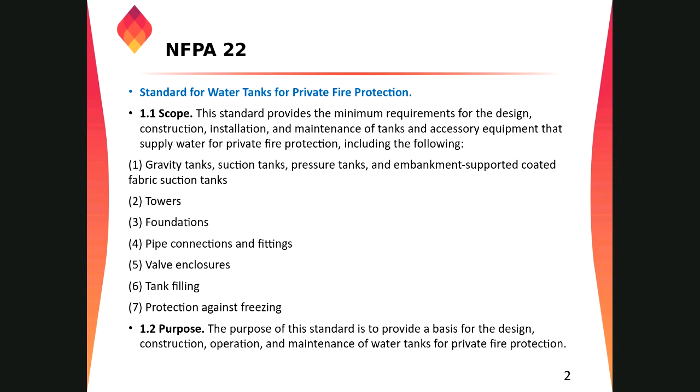So first, we are going with some of the general definitions. What definitions are there in NFPA 22?

You can see at the screen, we have the break tank. The break tank is normally needed between the public fire water supply and the connection to the private fire protection system, meaning before the fire pumps. The definition of the break tank is a tank providing suction to a fire pump whose capacity is less than the fire protection demand.

So we use break tanks after taking a connection from the public fire protection or public water supply. We'll discuss that in detail. For now, just know that the break tank is before the fire pump, and the suction of the fire pump comes from this break tank if there is a supply from the municipal water supply. We'll discuss it in detail in a while.

Suction tank means any tank providing water to a fire pump. There are different types of suction tanks: above ground suction tank, underground suction tank, and gravity suction tank.

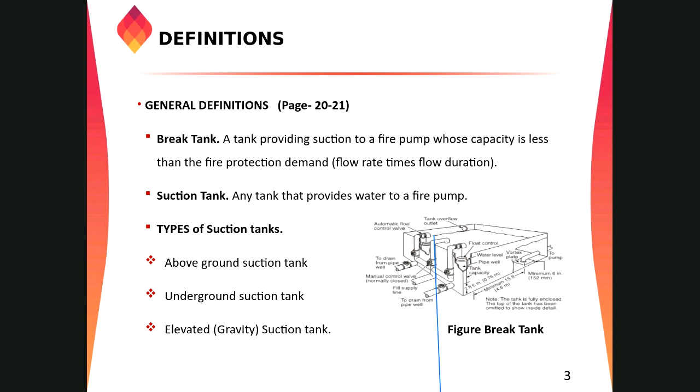The one you can see is a suction tank, an above ground suction tank. This is most common in Saudi Arabia or any petrochemical plant or any kind of plant. This is the most common one.

So you have to design the tank in such a way that when the pump is running at 150% of the capacity... Now we'll discuss what is 150% of the capacity. Suppose the pump is rated for 1000 gpm with some pressure. If that pump is running at 150% of the pump capacity, it means the pump is going to take 1500 gpm. We call this 150% of the pump from the performance curve.

So what I'm trying to say is that the tank should be sized for the pump duration. Duration means what is the fire protection system's maximum supply in number of hours. Normally it is from 1 to 4 hours. Based on that, we have to calculate.

Suppose your fire protection system requires 4 hours of continuous water supply. So we need 4 hours of water into this tank, and the pump is running at 150% of the capacity.

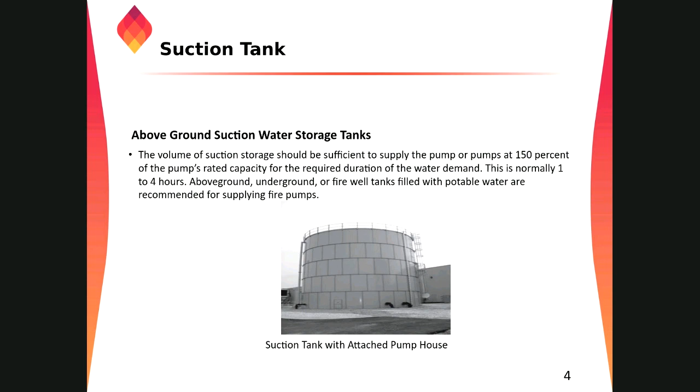The one you can see at the screen, we have a ground level suction tank. This is just the general component of the suction tank. On the left we have the notes describing each component, and on the right we have the schematic diagram. There is a tank, and just below the tank we have fire pumps which are taking suction from that area.

The first one is the pump suction tank, and the second we have a screened vent at the top. If there is some air inside the tank, it will go outside. The third one is the overflow piping.

This overflow, suppose the tank is continuously pumping water to refill the tank, and there is piping water going above this pipe to the overflow connection. The water will go out from the tank.

The fourth you can see is the steam coil for heating. This is normally required in areas where we have problems with temperature, when the temperature goes into the minus, or where we have freezing conditions. In that time we need a steam coil for heating. Normally in western countries like Canada, USA and Europe, where temperature is always in minus, they need this kind of arrangement. But in Saudi Arabia, I think there is no problem with freezing temperature.

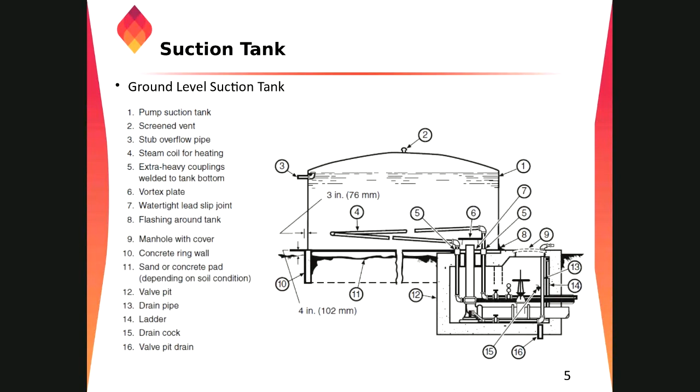We have a gravity tank. Gravity means the water is coming from the top due to the gravity.

So yes, I can't hear you. Does anyone have a problem with my voice? Hello? No, I heard you loud and clear. There's no problem here for me.

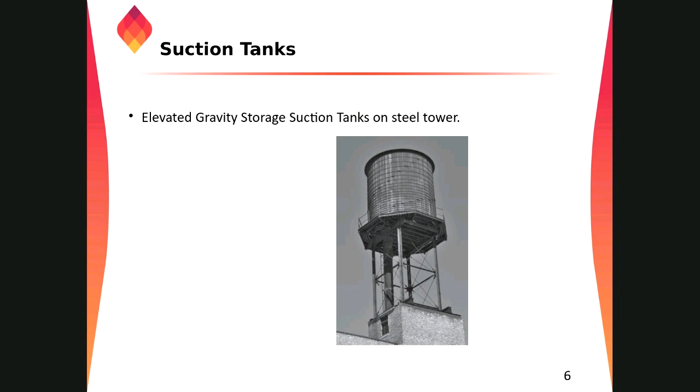The one here we can see is a tank riser. It's another kind of tank arrangement where most of the time we are getting water due to gravity. It is a high column.

Due to the cost of the fabrication of this tank and the maintenance requirement for the fire protection purpose in our areas in the Middle East, we mostly cannot see this kind of arrangement in normal ways, but in countries like the western countries, you can find this in some parts, like common tanks for supplying water to the fire protection system.

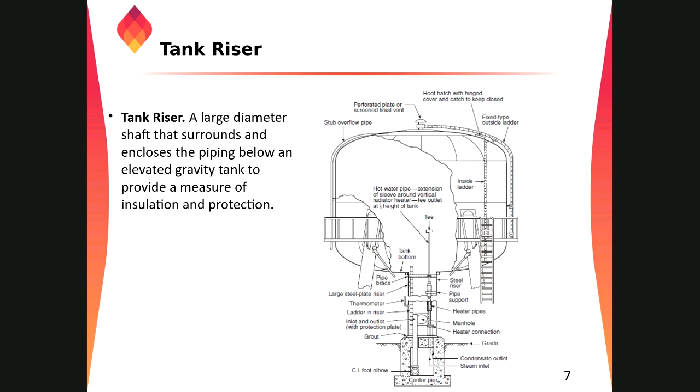Now we have listened to the public water works system. You guys downloaded the book manual that I uploaded 2 days before to the Blackboard. Yes.

Hello. I think everyone has it in the Blackboard at home. Yeah, they have downloaded. Okay. I don't know if they downloaded, but it's available for them.

So here we have connection to public water supply of the public water work system. When we are talking about public water system, we are mainly talking about the system supplying water to various localities for utilities like drinking water or whatever you find in our houses, for our daily day-to-day purposes. That is the potable water. Just wait a minute.

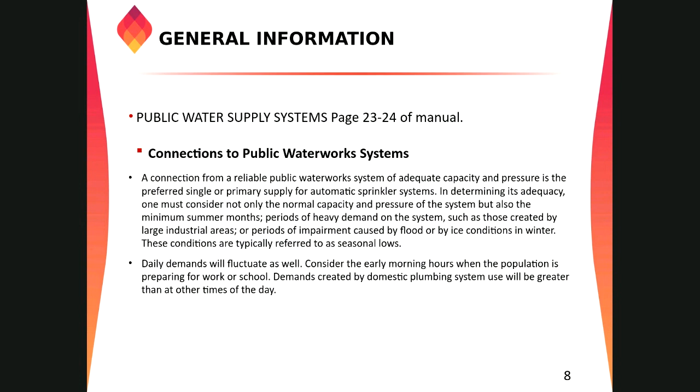Okay, moving on to the next slide. We have cross connection between public and private supplies, right? Now what is the meaning of cross connection?

Public water supply is for hygienic purposes, for the consumption of daily demand in each household. They can drink the water, they can use that water for all kinds of purposes at the house. Now we have the private supplies, which we are calling the fire protection system. The public water supply is potable water, meaning it is in hygienic condition and we can consume it, drink it, and use it for all kinds of purposes. The private supply or fire protection system, most of the time, doesn't need water as pure as the drinking water. We call it non-potable water, right?

So what happens sometimes, due to the difference in pressure? The fire protection system works at 12 bar, and the pressure on the public side is around, let's say, 5 bar. So what will happen? The pressure from the fire protection system will be so much that it will push toward the public connection, into the main water lines for general household consumption. Now this fire protection system water contains some dirt particles, some pollutants that are not good for drinking. So when this water mixes with that water, it is no longer hygienic, and there is an issue with public health. So we call this cross connection.

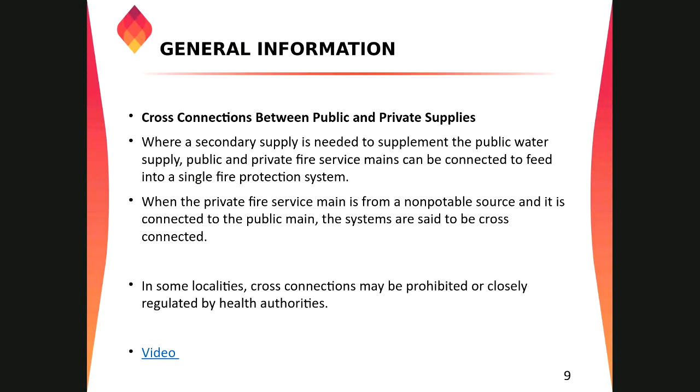So when you are using cross connection, you have to use backflow prevention. Now, what is backflow prevention? We'll discuss that in a while, and I will go into more detail about backflow prevention.

Now we come to the sources of water supply, from where we can get water for the fire protection system. We can get water from ground tanks and cisterns, rivers and ponds, small streams and brooks, harbors, rivers, and wells. Most of this you can find in our area. In our area, most of the time we are not taking water from rivers or ponds, small streams and brooks, harbors, rivers, and such, because this seminar and these classes are totally based on NFPA, and NFPA includes all those requirements because in those areas they might use this kind of connection, since water is available in adequate quantity in some government areas in USA, Canada, and other parts of the world. So we have included this one. We'll have a look at the requirements and various things.

Now there are ground tanks and cisterns. The first one we are talking about is ground tanks and cisterns.

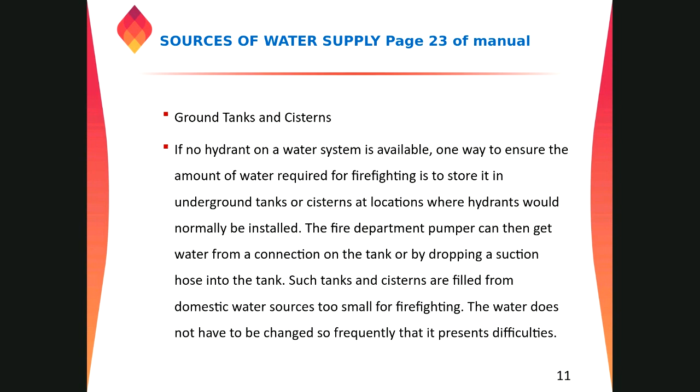This is the oldest type of cistern, but it's not common in our area. They mainly use this in San Francisco, Chicago, and some other US cities. As far as our Middle East region is concerned, we are not using this arrangement in most cases.

You can also take water from rivers and ponds, but there are some criteria. We have to make sure water is always available in the river at some level. Normally the water level in the river goes up and down based on the season - maybe in summer the water goes down, or in the rainy season the water level goes up. So we have to be careful while selecting our approach with rivers and ponds.

You can see fire department trucks taking water from the river in case of fire. So rivers and ponds are mostly applicable for the fire department team, for pumpers or fire trucks, to take water from these areas to fight fire in case of emergencies.

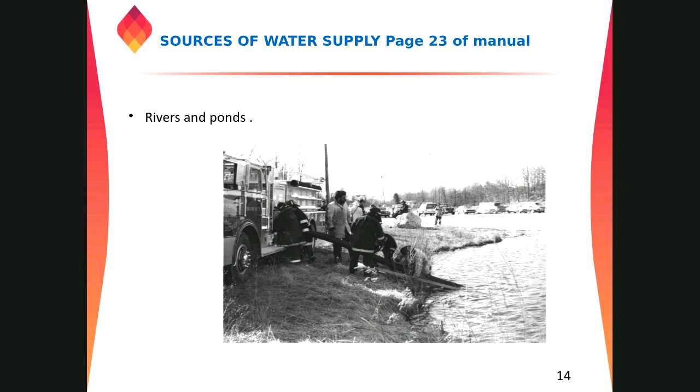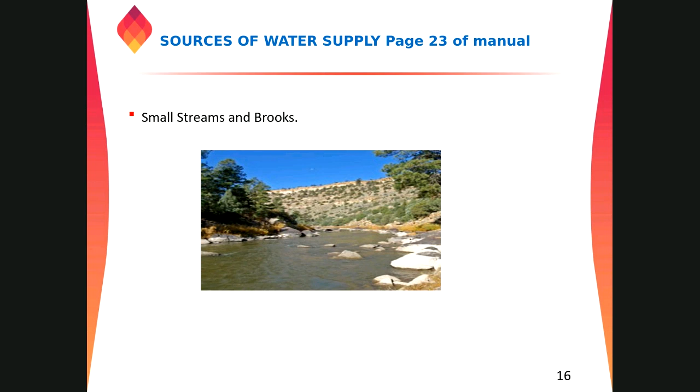We also have small streams and brooks. If water is available in these areas, we can allow taking water from there under some conditions. We have to be careful about the location where the fire apparatus will stand, because as you can see in the figure, we have to take our trucks to the nearby area to take water from this area in case of fire. All these requirements mostly do not apply to fixed fire systems - mostly these are for the fire department team to use in case of emergency, to determine from where they will take water in case of fire.

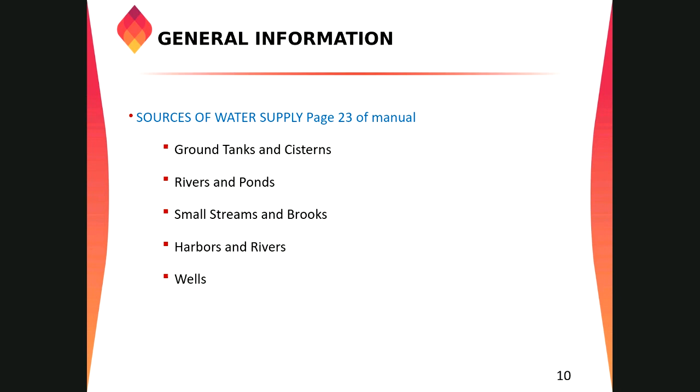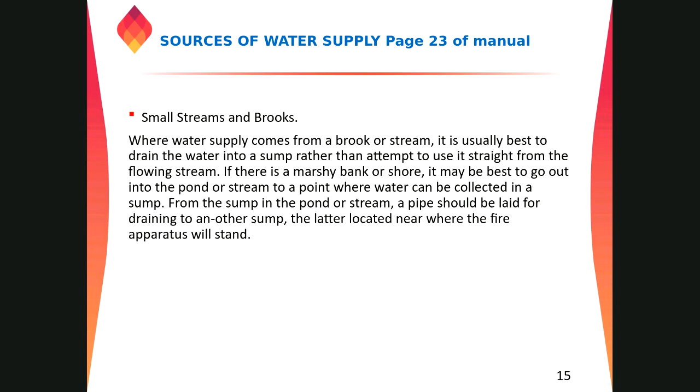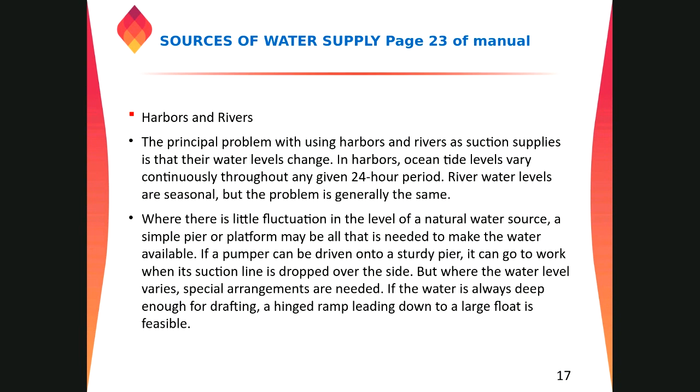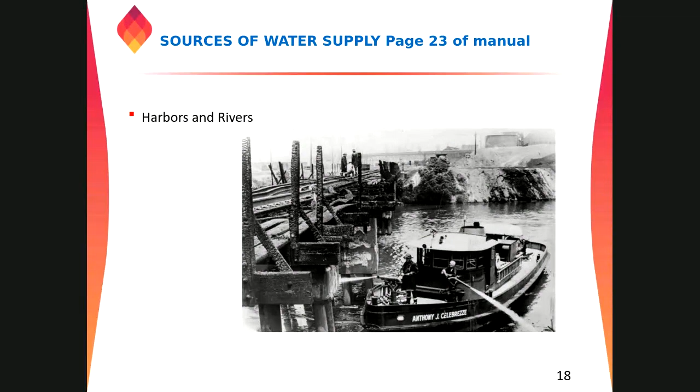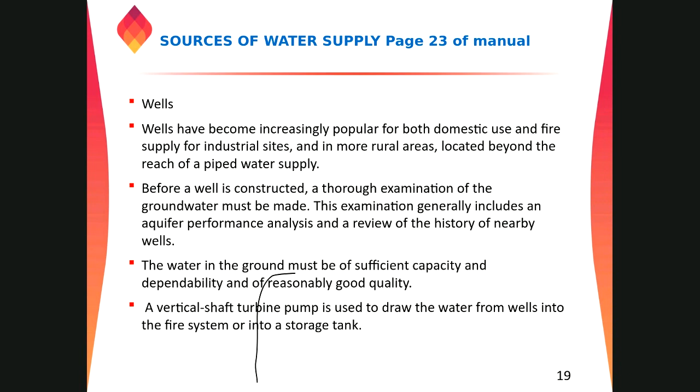Now, when determining the reliability of a water supply source, we should keep certain things in mind. How reliable is this water source for our fire protection system, because the fire protection system needs water most of the time, and we have to be careful with that. The following things need to be considered: the minimum yield, and the frequency and duration of drought. You can see that in page 27 or 28 of your books.

Normally in some areas, during summer time, there might be drought and no availability of water, so we have to be careful regarding that. Condition of intakes - what kind of dust particles or any foreign material in the water available at those areas.

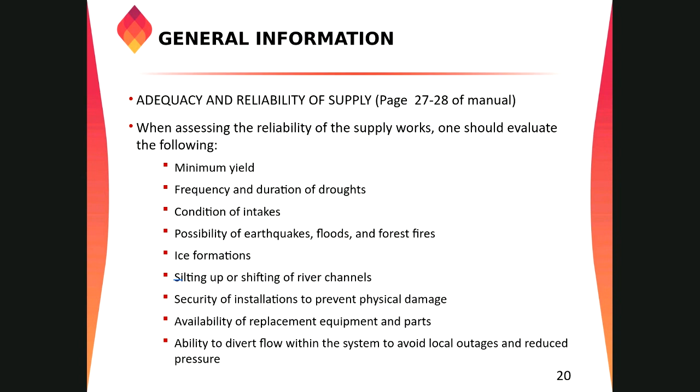This is some of the adequacy and reliability of supply. We have to be careful regarding that.

Now coming to means of moving water, right? We know that we have to push water at high elevation.

Normally, if the height of the building is above 12 stories, for that building we need different risers. There is an express riser above that, and water will go to it. We call it pressure zoning of the system.

So if the building height is more than 12 stories, in those areas we need a separate water distribution system, usually provided for the elevated section, so that pressure can be maintained. There is an express riser - the riser takes water to only after the 12th floor, and there will be one tank, and from that tank another fire protection fire pump arrangement, and the pump can take it to the other parts of the building. So what is the idea

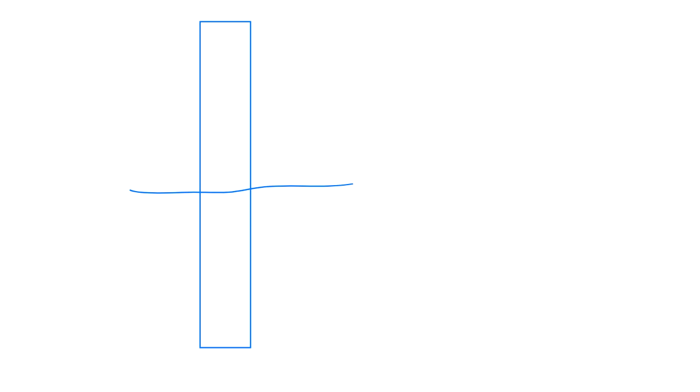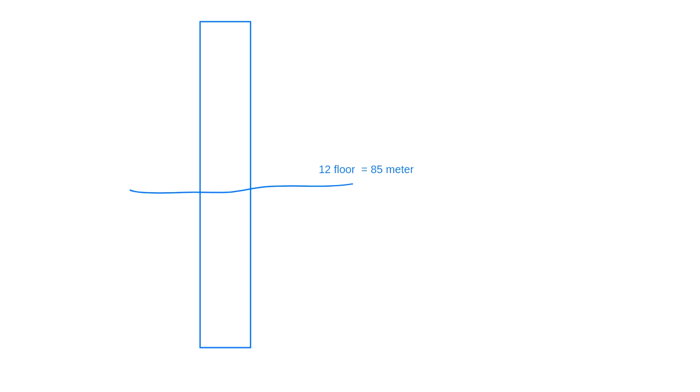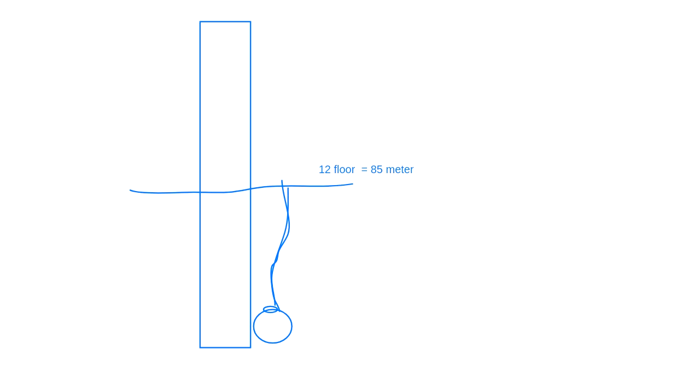So if we have the fire pump at the base, taking water from this one to this level at the top - the arrow goes curved, but it is just straight, keep in mind. This is our pump room, and we are taking water from the pump room up to this level, the 12th floor.

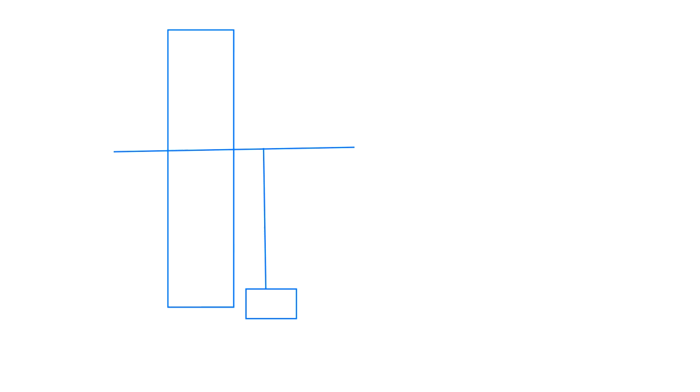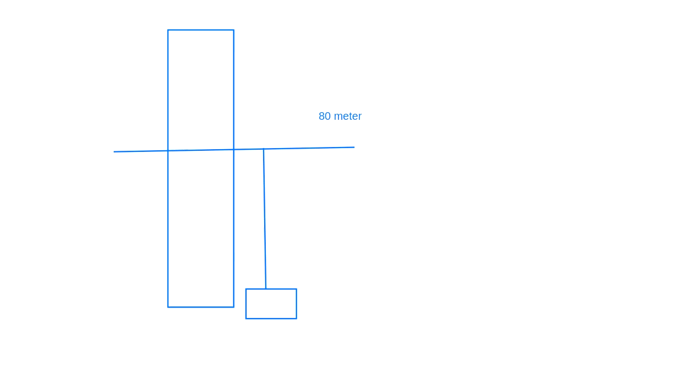Let's say this is at a height of 80 meters. If you are converting 80 meters to feet, we know that 1 psi can lift 2.31 feet, if you remember from our hydraulics book. So if you are converting 80 meters to feet - 1 meter is equal to 3.3 feet - converting meters into feet, it comes around 264 feet.

We know that 1 psi needs to lift water 2.31 feet. So you have to divide 264 by 2.31 feet to get how much psi we need to reach 80 meters of building height. If we further divide 264 by 2.31, we'll get some values.

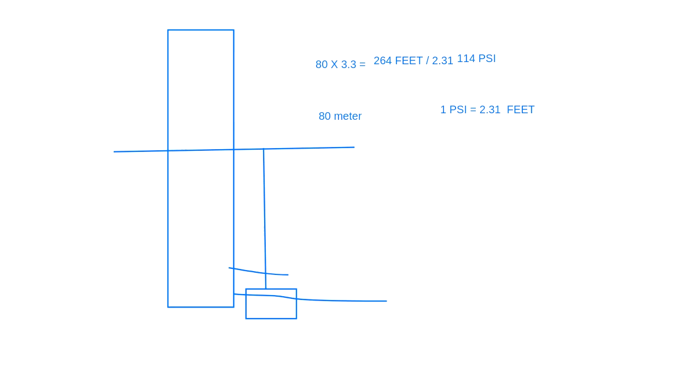Some students report they cannot see the blackboard clearly, saying it appears blank or white, while others say it looks clear. They discuss whether there's a network issue causing the problem, with some seeing writing in blue and others seeing nothing.

Let me re-share again, since it wasn't clear for some of you. I will share a Word file after this class on this topic so you can see it clearly. But now we will move on, and I'll explain that later. I was trying to explain, for a height of 80 meters, right?

We need at least 114 psi of pressure to lift water up to this much height. Now, suppose there is a fire hose connection, a standpipe system fire hose connection, that needs a minimum of 100 psi pressure to operate. So we already lost 114 psi lifting water to that height.

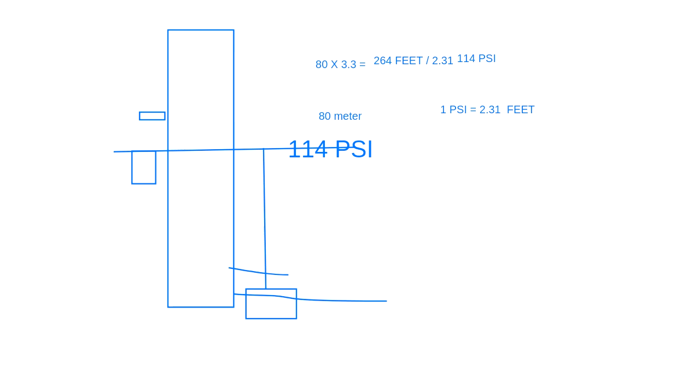Now again we need 100 psi. So what will happen? If you combine this together, we'll go to 214 psi. The pressure goes very high, right?

So we have to design the system such that either water after this level goes by one riser, and then from this area we put another tank, another fire pump equipment, another pressure zone to deliver water to the upper part of the building.

Or we can use fire pumps of higher capacity, multi-stage pumps having different outlets - a low pressure zone and a high pressure zone. The low pressure zone can go up to this level, and the high pressure zone can go above that. We'll discuss this in detail in fire pump, maybe tomorrow.

114 psi is the pressure required to lift water up to this level, right? Now, the maximum pressure NFPA recommends in a wet-pipe fire protection system is 175 psi. So if the pressure goes above that, we can use pipes and fittings of higher pressure ratings that can withstand pressure up to 24 bar or 350 psi.

NFPA also says these rules don't apply to standpipe systems, which you use to connect to the top of the building. In that area, the building height is so high that a normal pump cannot take water up to that height, so we can use up to 350 psi pressure there. So we need a different pump.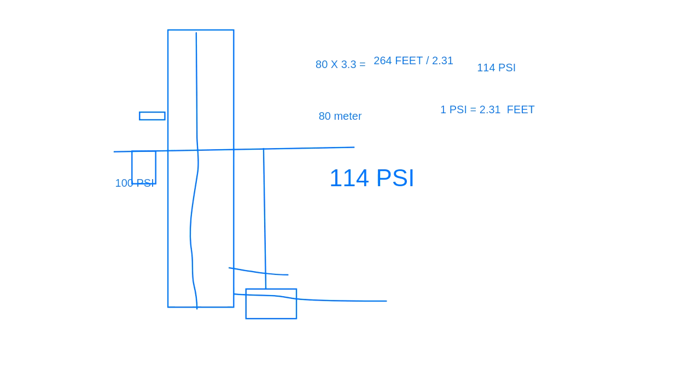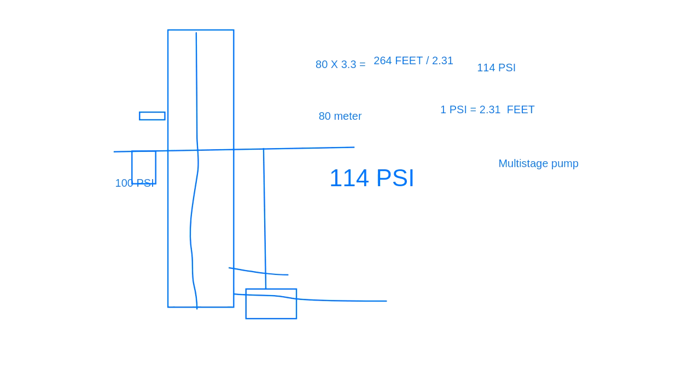There are different kinds of arrangements: multi-stage pumps, and different pressure zones. We can take an express riser to lift water up to the top of the building - one riser goes up to a certain height, the other riser continues after that; we cannot connect them directly. The third option is to use a PRV, pressure relief valve or pressure reducing valve, to reduce pressure in the lower zone and increase pressure in the higher zone.

For those not getting this sheet, I will share this detail after class in a Word file and send it to you, attached to the Blackboard. You can download it from there and see it. If you have any comments, you can ask me tomorrow.

Now let me go share the file again.

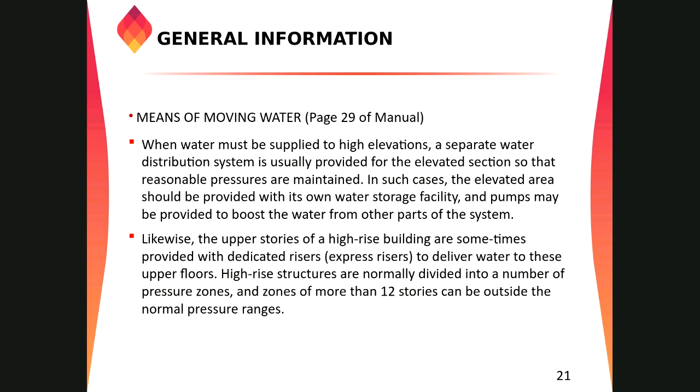Now we come to the water storage tank. There are different kinds of storage arrangements we can use for storing water. It might be an elevated tank, ground level supply, or underground storage tanks of metal, wood, plastic, rubberized, rubber fabric - these are examples of some storage facilities. And as discussed earlier, rivers, ponds, lakes can also be used. All this should be designed, constructed, and allowed as per NFPA 22.

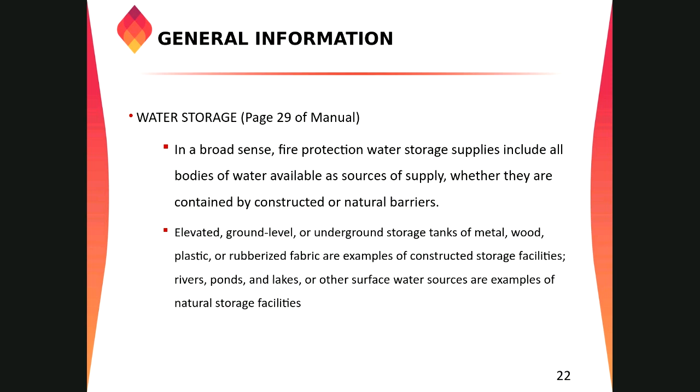Now we are coming to John Freeman. He is one of the scientists, a hydraulic engineer. John Freeman was well known for his contribution to hydraulic engineering, and one of his great works was for the Panama Canal. He did excellent work there for water analysis. He gave analysis for water utilized for the fire protection system and water utilized for general utilities like public health and sanitization work we see at our homes.

What he differentiated is that the ordinary supply need and the fire protection supply need are totally different. The ordinary supply may sometimes be high, sometimes low. Our consumption is sometimes high, sometimes low. As I discussed earlier, in the morning there may be high pressure and flow requirement, high demand for the municipal and residential areas, as people get up, go to the office, take baths, and consume water. But in the daytime, demand will be low and availability of water will be high.

So John Freeman says we have to keep in mind the fire protection system should be sized in such a way that at any time, in any case, 24/7, 365 days, the supply for the fire protection system cannot be below the design of the system. Let's say a pump needs 5 hours of continuous water supply for a high hazard fire protection system - so we need supply of water in the tank for 5 hours continuous without any problem. This is the first thing John Freeman said.

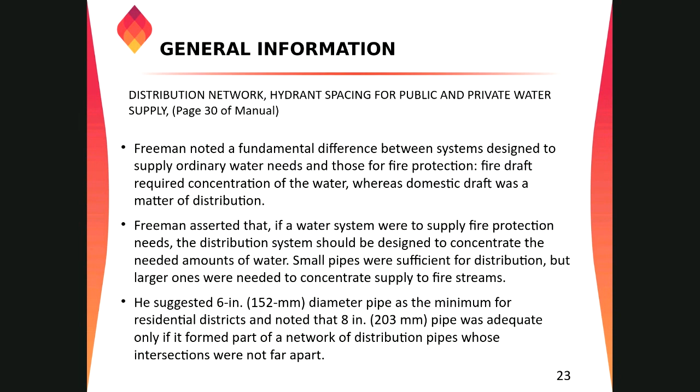The next point John Freeman makes is about the distance between two hydrants. You must have noticed walking towards a hydrant that fire hydrants are not closely spaced. Maybe the fire hydrant is spaced 100 meters apart, or maybe 122 meters apart, and so on.

Now we have standards. We can directly refer to various codes like Saudi Building Code, International Building Code, or NFPA 1 for the water flow requirement for hydrants. But at that time, when the research work was underway, John Freeman's work says that in residential areas we can use up to 153 meters distance between two hydrants. The minimum is 76 meters between two hydrants in the mercantile and manufacturing districts. Suppose you are going to the Dammam industrial city, third or second - in those areas it might be 76 meters, because in those areas we see high hazard is available. So if there is a fire, we need more water, we need a higher stream of water to fight the fire.

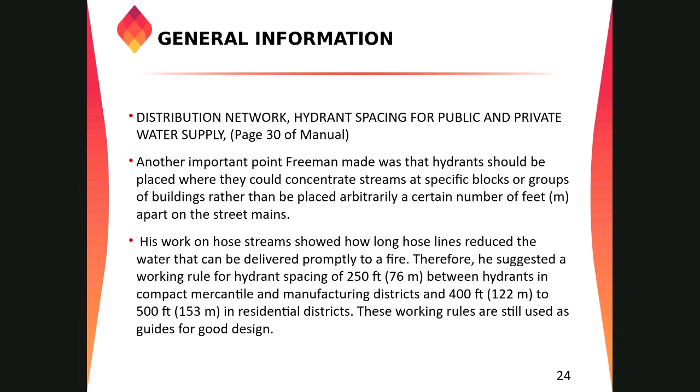Next point: Freeman says that if there is a fire protection connection to a fire tank, the fire protection supply should be after domestic consumption. Let's say in 24 hours, after the water consumed for domestic use by building occupants or people around the area, we need to have maximum available water remaining for fighting the fire. We cannot compromise with the fire protection system.

Okay, coming back to water pressures, if you are looking at pages 31 and 33, do you guys have any doubt before this slide, from the beginning? If you have any doubt, you can speak now.

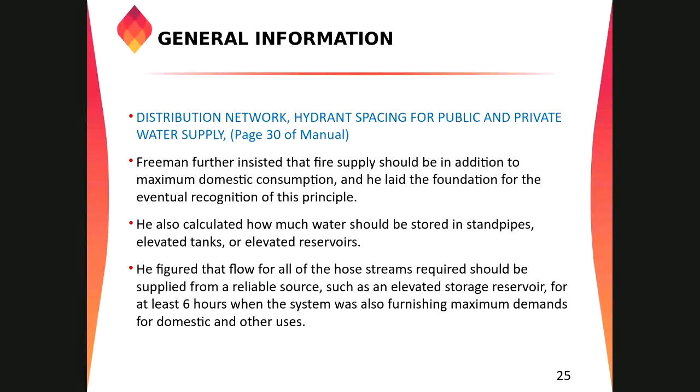Okay, we'll move on to water pressures. I think we discussed this point in fire protection hydraulics, but we'll discuss it a little again to make it clear what the principle of pressures is. The normal pressure, what we call normal pressure, is the net pressure inside a pipe.

When water is flowing inside the pipe, the pressure acts perpendicular to the pipe. You can see this is PN, the normal pressure. Pressure always acts perpendicular, meaning it acts around the wall, to the thickness of the pipe.

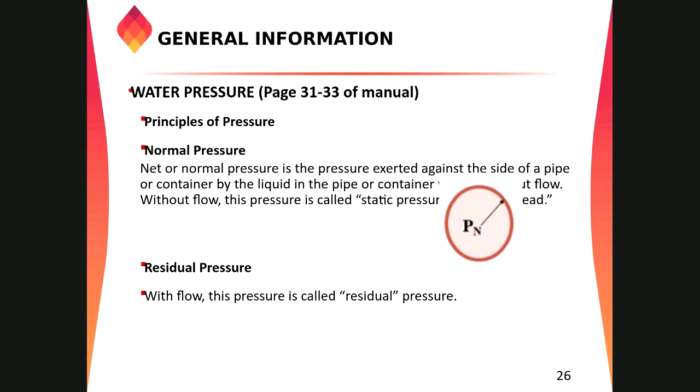And the residual pressure is, when water started flowing in the system, how much pressure is balanced. Because when there is no flow, we call it static pressure, as we discussed in hydraulics. When there is flow, there is no static pressure anymore, it becomes residual pressure, meaning while water is flowing, how much pressure we have balance in the system. This is the basics of static pressure or normal pressure, which we discussed in hydraulics before.

I think if any of you can explain this figure from our previous discussion in hydraulics, that would help me understand if you guys still remember what we discussed in hydraulics for fire protection.

Yes, the pressure will just be the vertical column of water above the point that we are measuring the pressure. Exactly, it depends on the height of the column. It doesn't depend on the shape of the column, but on the height of the column. The higher the height, the higher the pressure will get.

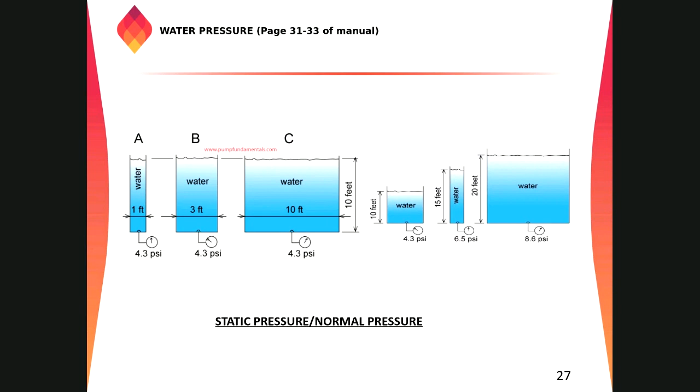Okay, we'll move on. Here we have the residual pressure. Now, residual pressure is the pressure in the system when the hydrant is flowing, because that hydrant becomes the flow hydrant, or we measure at that hydrant the flow pressure. And some distance away from that, we have the residual hydrant, which we call the test hydrant, for static and residual pressure.

We can consider here, what is the idea about that? Suppose you are working in a plant, and what we want to ensure is that while water is flowing, let's say the hydrant is open, fighting a fire, at that time how much pressure is balanced in the system. As per the American Water Works Association (AWWA), we need a minimum of 20 psi residual pressure in the system while water is flowing.

What is the idea of that? If the pressure goes below 20 psi, there are two concerns. The first concern is that the quality of the water stream going very high and very far from the nozzle openings to fight the fire might decrease. If the pressure and flow are not sufficient, the water will not go at a higher rate.

So it might not be sufficient to fight the fire. The first one. The second one is not related to the fire protection system, but it is related to the public health supply. We discussed a lot regarding public water supply. They said what the water supply companies, like here we have Marafi and other purveyors, what they want to know is the pressure in the system, in the piping, goes below 20 psi.

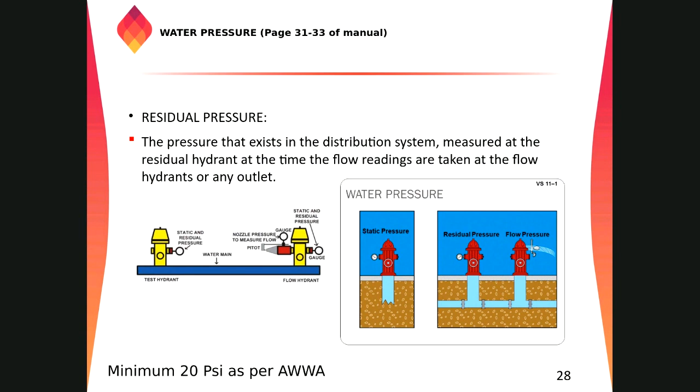Now we have capacity and elevation. In page number 33 in your manual, if you are seeing the manual, you can see that one. Now we are talking about the capacity of the tank and the elevation of the tank, right?

The capacity of the tank shall be sized based on the demand of the fire protection system. Let's say a big warehouse contains highly combustible and flammable materials, like rubber tire manufacturing or storage areas, or areas where we have high hazard materials stored, plastics and those kinds of Group A plastics. In that area, if there is a fire, we need more quantity of water, and the duration of the supply will also go up. So we have to select based on the demand from the fire protection system.

Suppose you are designing a fire protection system, let's say a sprinkler system. Once you do your piping into the building and do some hydraulic calculation, and your hydraulic calculation says you need 650 GPM at 80 psi, now we have to size the tank based on the hazard classification. Maybe 120 minutes as per NFPA 13 is the minimum requirement for extra hazard. So we have to multiply 120 minutes into 650 GPM to get the water supply for our fire protection system.

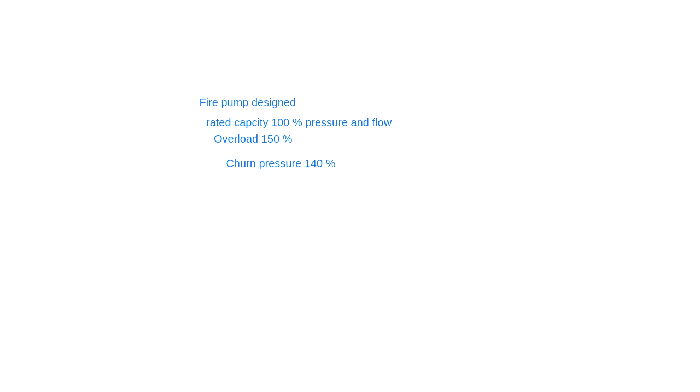What I am trying to say, the 150%, let's say this pump is designed for 1000 GPM at 100 psi. At the overload, or 150% capacity, the capacity of the pump can go to 1500 GPM, but at that time the pressure into the system cannot be less than 65% of the rated pressure. So these are the conditions of the fire protection system.

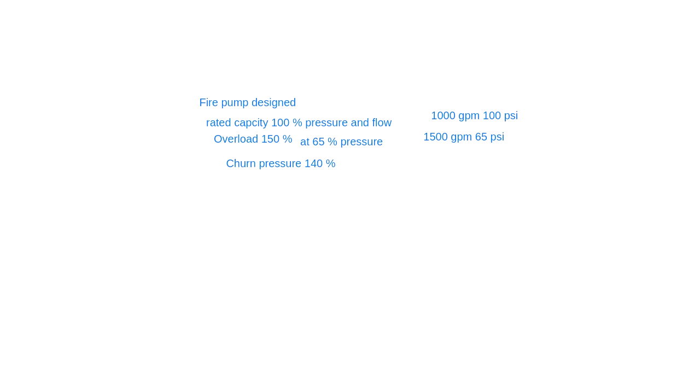Whenever a pump is designed, the pump manufacturing company designs the fire pump in such a way that it is designed for 3 conditions. The first one, rated capacity, means we have to order a pump of 1000 GPM at 100 psi. Now we have to make sure from the pump curve that the pump can also work at 150% of the rated capacity, meaning 1500 GPM, and at that capacity the pressure cannot go below 65% of the pump's rated pressure. What I'm trying to emphasize here, suppose this is a pump, this is pressure in psi and this is flow in GPM.

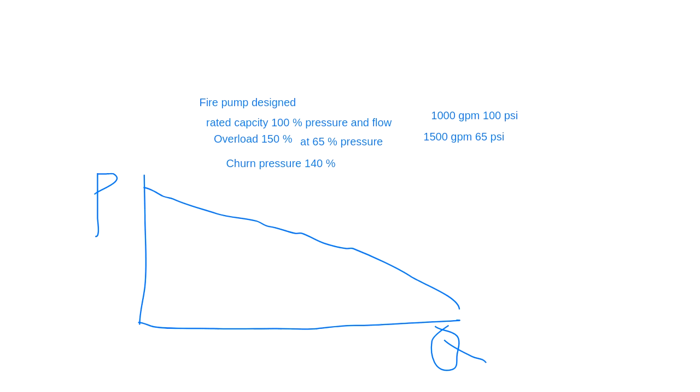When the pump is started, there is a zero flow condition in the pump, the pressure is maximum. This point, when there is no flow in the pump, we call it churn. No flow or churn means the maximum pressure will be in the pump at that condition. Here we have the maximum condition in the pump, and let's say the pump is rated at this location.

This is our 100% capacity, meaning we are getting 1000 GPM and 100 PSI. And if you go further to 1500 GPM, the curve goes down further to this location. This is our overload condition.

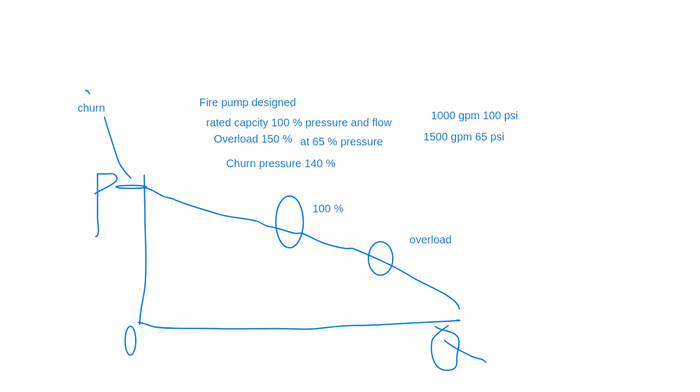At this location, the pressure in the system cannot go below 65%. So this is the meaning of overload. Keep in mind that for a 1000 GPM pump at 100 PSI, below 65% of the PSI the pressure is not enough for some fire protection systems. Like a standpipe system, class 3 or class 2 standpipe system with a 1.5 inch connection or opening of the hose, that needs a minimum of 65 PSI for a solid nozzle stream for fighting the fire. If the pressure goes below that, the flow characteristics will not be normal.

So did you guys understand regarding the overload condition and the capacity? If you have any doubt, you can speak now.

Mr. Rafi asked: what exactly is the purpose again for the overload? It's clear for me actually, but what is the purpose, or why is there this requirement of 150% against the 65% of the pressure, and also in the churn pressure or zero flow, why is it 140%?

What is the meaning of churn pressure? When there is no flow, we have to test the performance of the pump based on the NFPA 25 inspection, testing, and maintenance, and we have to make sure our pump is running as based on the manufacturer and the design.

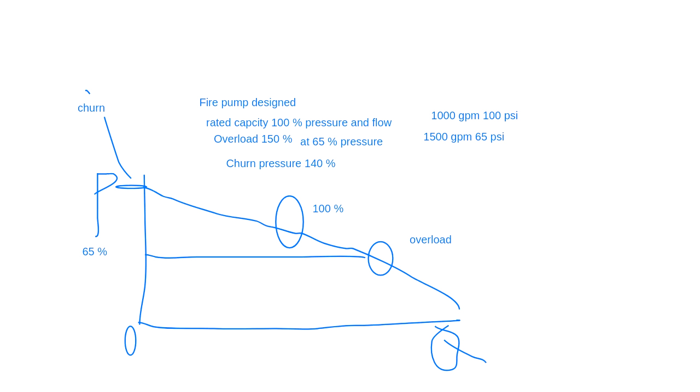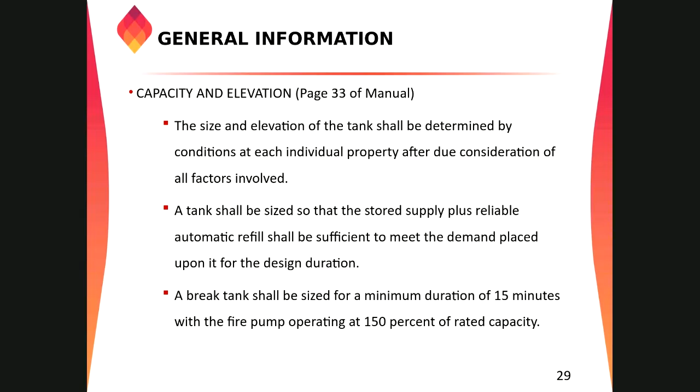Okay, we discussed about the capacity and elevation. Now we are coming to some of the standard sizes of the steel tanks. You can get this from NFPA Fire Protection Handbook and NFPA 22. The capacity ranges from 5,000 gallons to 500,000 gallons. Based on our requirement, we can select the steel tank size, and other capacities are also permitted, subject to approval of the authorities having jurisdiction and some insurance company.

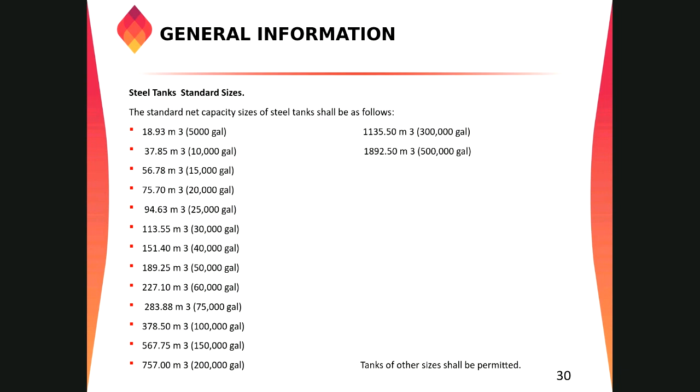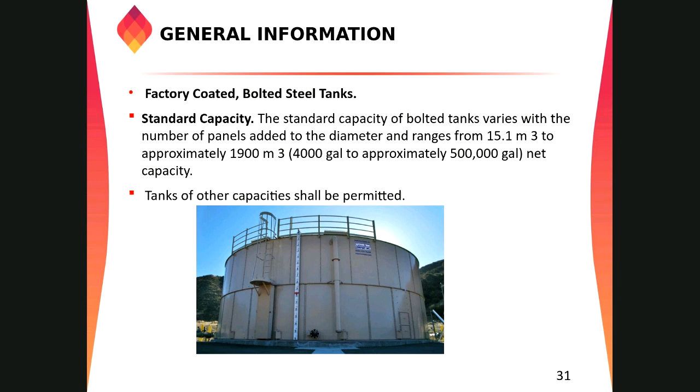Here we have the pressure tanks. I think we are not using these pressure tanks in the Middle East. What is the meaning of pressure tanks? This can be used only for small water requirements, like a small sprinkler system in a residential complex, in your homes, or areas where we need only limited capacity sprinkler system, and where we don't have any space for fire pump installation, or that system is very costly. So this arrangement can work without a pump.

The idea is that the sprinkler system will always be below the tank, right? So that we have the advantage of gravity. And why do we call it the pressure tank? From the top we have to keep 1/3 area as air or inert gas, meaning we need a compressor. A compressor will compress the air or gas from this piping into the tank, and here we can read the capacity of the air. 2/3 will be water, meaning 66% water in the tank and 33% air in the tank.

What will happen when there is a fire? The sprinkler system will break. The water, due to gravity and also due to pressure from the compressed air, will come out, and we can fight the fire. Now again, this is very limited application.

Limited for private fire protection, like sprinkler systems, standpipe, and hose systems. You cannot find this kind of arrangement in modern days or in our areas. You may find this kind of arrangement in USA, Canada, and those kinds of parts.

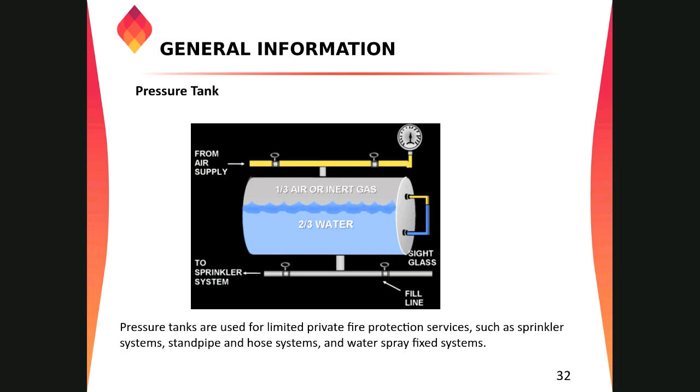The capacity of the tank should be approved by the AHJ, and it should meet the supply demand of NFPA 13, chapter 14, installation of sprinkler systems. And again, the maximum capacity of this tank is only 15,000 gallons, like 34 cubic meters. So you can see the size of the tank is not so adequate for a big fire protection system. Hence, this is not the most common or most applicable in the fire protection industry.

But again, it is discussed in the Fire Protection Handbook, Society of Fire Protection Engineers, and NFPA 22 also, so we have to discuss it.

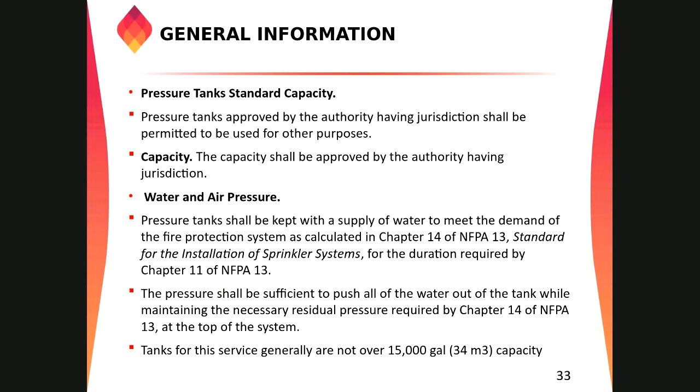Now here we have one exercise. We have to calculate the duration of water supply from the tank. Let's say the capacity of the tank is 50,000 gallons, and a fire pump has a capacity of 2,000 GPM, and the pump is running at rated flow, meaning 100% flow. So what are they trying to say - for how many minutes or hours will the water go to the fire protection system? You have to use your mobile for calculating this, or just say your idea. That will be 25 minutes - you have to just divide, right?

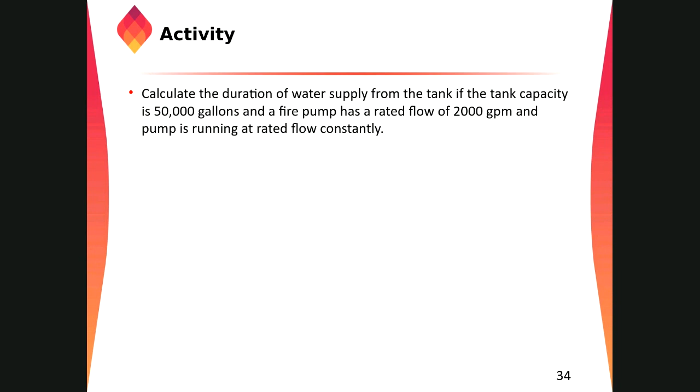Yes. Abdullah Al-Karni, Ahmad Besa replied. Anas, Muhammad Al-Haziri, Muhammad Jasiri. Okay.

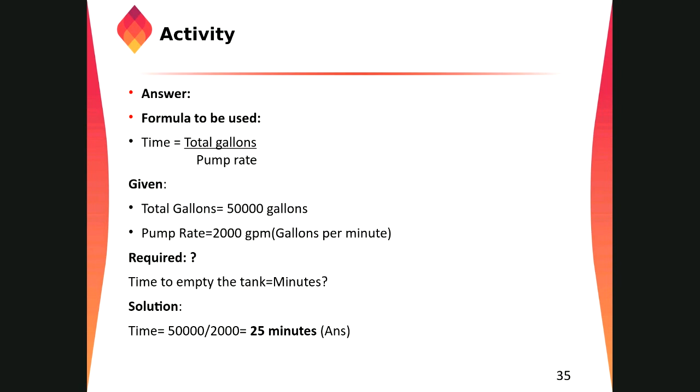Moving on to the location of tanks. The location of tanks will be such that the tank and the structure are protected from fire exposure. Your tanks should not be located in a high hazardous area.

Let's say you are working with SABIC or Aramco in some petrochemical facilities. Your fire pumps and storage tanks should be kept as far as possible from the process area, because the process area always has chances of high hazardous substances and material, and a fire there can go so intense that it damages your fire protection system. If the heart of the system is not there, you cannot protect the plant.

So you have to keep your fire pump unit, including the connections and tanks, as far as possible from those areas. There is some guideline for high commercial safety from UL, FM, and some of the insurance companies, based on different criteria.

I have read in one book a quote that said your fire pump unit should be at least 75 meters away from the process area, because they want to ensure that their system is working at full capacity in the maximum case of fire.

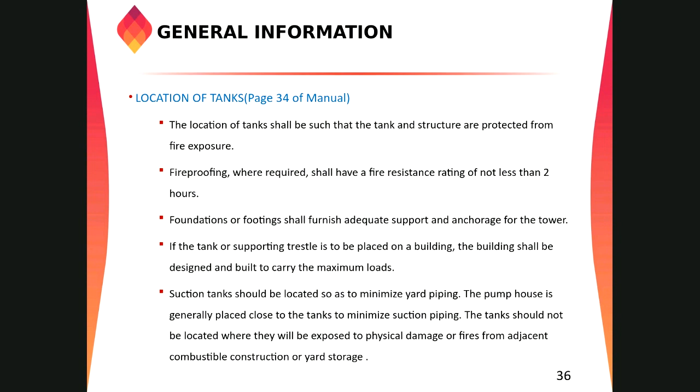Yes, we have a design for earthquake resistance. Fire protection water storage tanks need to be designed to resist earthquakes. Mostly in case of an earthquake, when the earth is shaking and a building collapses, the first thing that happens after the earthquake is fire.

When there is an earthquake and a building suddenly collapses due to various flammable and combustible arrangements in the building, there will be fire, and we need to protect against that with the fire protection system. This is not common in all areas, but in areas with a chance of earthquakes, if you are designing your fire protection system based on earthquake protection, we have to follow some guidelines for earthquake protection to minimize damage to the tank, pumps, and pipings.

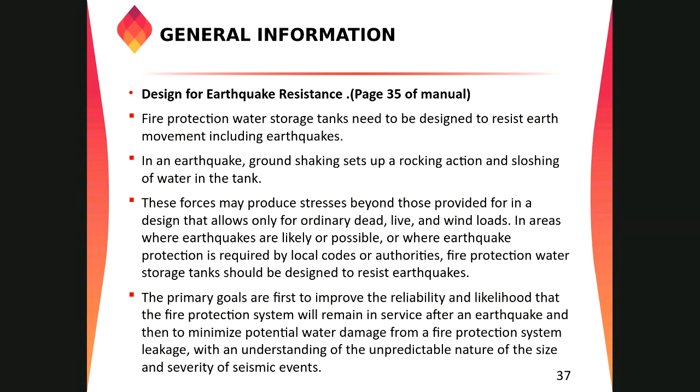Now we're discussing load types. We have dead load, live load, and wind load. What is a dead load? Suppose there is a building - your building where you are staying, all the concrete, all the solid foundation, concrete and steel structure, beam, column, everything inside your house which is construction and which cannot be moved from one place, which is fixed. We call it dead load.

For calculating the dead load of the building, the weight of steel is 7,849 kilogram per meter cube, and concrete is 2,307 kilogram per meter cube. Based on the density of the steel and density of the concrete, we can calculate the weight of the building. If you calculate the total weight of the building, based on that we have to support the foundation, the basic foundation of the building. You got the point?

Live load means that is moving time to time. Let's say you are going to a mall, a shopping complex. There is an elevated area at the top of the building, there is a car parking. The number of cars going and coming is not fixed. We call it live load, that means it is changing from time to time.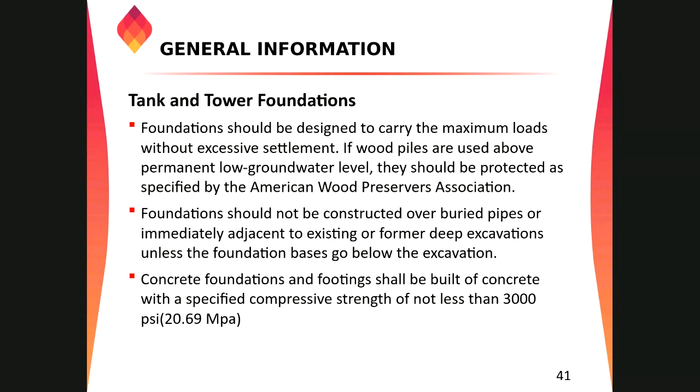Mr. Ravi, yeah, you come back to the slide before. Okay, this one. No, back. Yeah, no, next. This one, next.

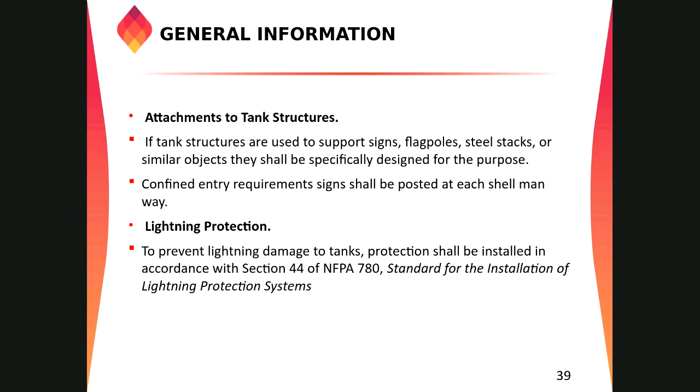Wood tanks, if you are keeping them empty, by time to time there might be some shrinkage in the tank because of the properties of the material. Wood shrinks over time. So it is the properties of the wood that it will shrink, the area of the wood will decrease, and then something will happen to the integrity of the tanks.

Yes. Hello. Okay, thank you. Yeah, it's like by time to time the wood may change its properties, so we have to be careful regarding the wood.

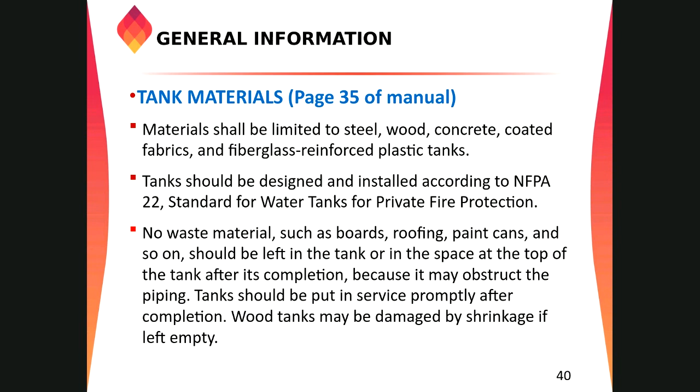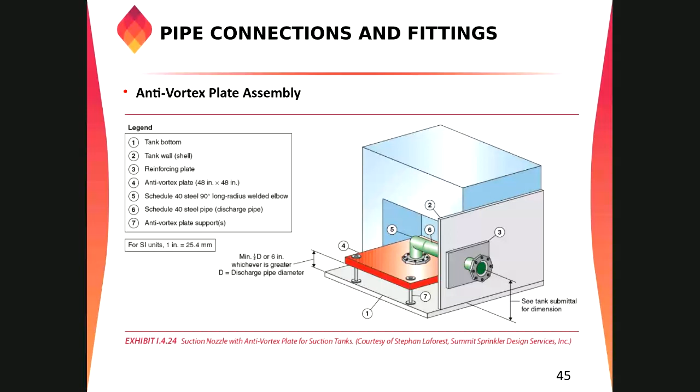Or you can use the grooved fittings after the pump.

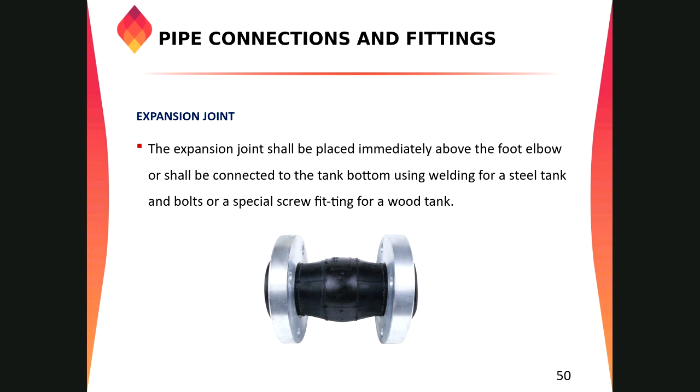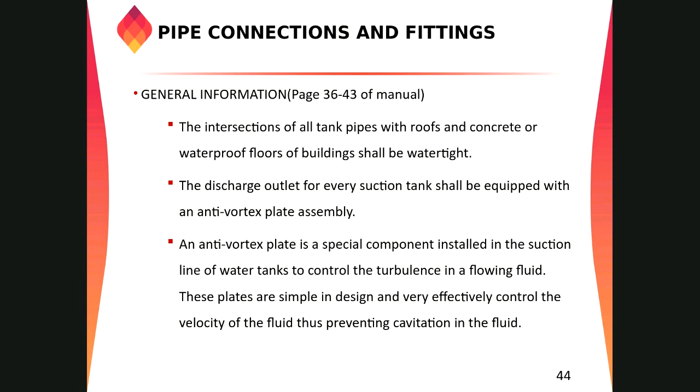This is point number three.

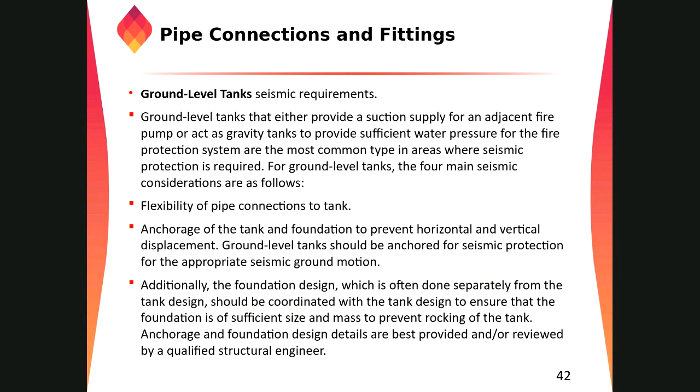If in the pump house there is any kind of penetration through the pump, it means if there is piping penetrating a wall, there should be at least 2-inch clearance provided on all sides of the piping. Suppose your pipe is 4-inch coming to the wall, there should be a 6-inch opening into that. 4-inch for your pipe and 2-inch extra, or 50 mm extra, for the clearance, so we may put some other things in there to avoid any kind of break to the wall, or maybe fill it with material for fire protection rating or fire resistance rating, like a fire protection barrier, passive fire system.